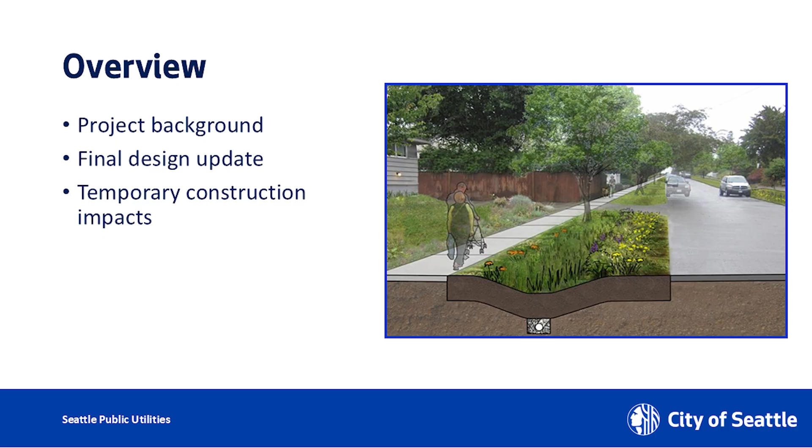I'm here to present to you the final design update for the Holden Natural Drainage System (NDS) project. Since this is the final design phase, I will be presenting a brief project background and focusing more on the design changes and temporary construction impact. All right, let's jump into project background.

So what is the problem that we're trying to solve here? Well, we live in this beautiful city that is surrounded by natural resources, and we have a lot of rain. The rainfall comes down and lands on neighborhoods, roofs, driveways, parking lots, and streets. And the runoff carries a lot of pollutants into our water bodies, in this case Longfellow Creek, the Duwamish River, and the Puget Sound.

Each year, more than 12 million pounds of pollutants are carried into our water bodies by stormwater runoff. This is not good for our environment or the citizens who live in this beautiful city. So we need to do something about that.

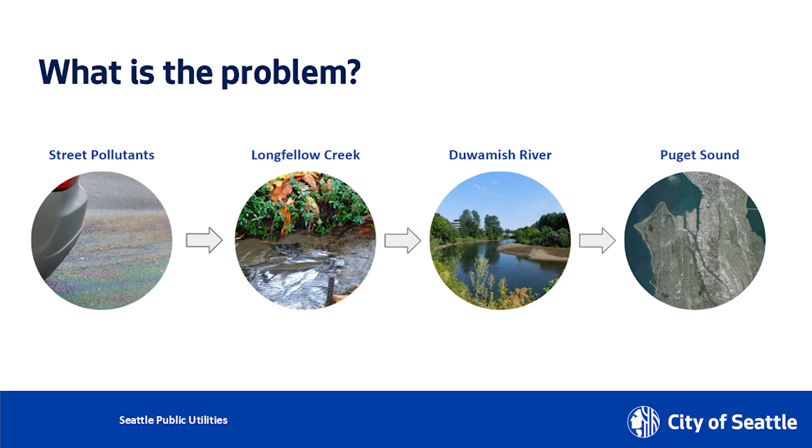So why natural drainage systems? As urbanization occurs over the years, our native forested land is converted to urban landscape. This urban development creates a set of issues, such as increased pollution, and reduces the land's ability to filter or clean stormwater through plants and natural soils. Therefore, the stormwater carries pollution into our neighborhoods, creek systems, and eventually to the Puget Sound.

Natural drainage systems essentially emulate nature. They collect rainwater and remove pollutants before they reach our creeks and waterways. We can't go back to the time when this land was a forest, but we could retrofit our city with natural drainage systems to help it function more like the native land it was.

So the benefits to the community include improved stormwater or drainage water quality, increased landscaping diversity, and new street trees. We'll be planting special plants and street trees. Because the natural drainage system is created between the sidewalk and the roadway, it creates a buffer from moving cars for pedestrians. Because of the greenery that we'll be installing, it will improve air quality and have some noise reduction benefit.

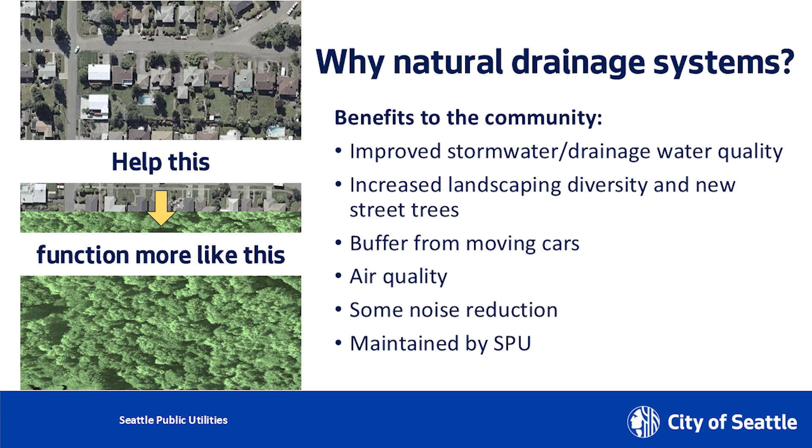Best of all, it will be maintained by SPU. We are not requiring the neighborhood landowners to maintain any of the natural drainage systems. In fact, we prefer SPU to maintain them.

Let's talk a little bit about how natural drainage systems work. In front of you is a 3D drainage diagram of an NDS system. I will go through the legend one by one and explain how an NDS system works. An NDS system is usually built between the sidewalk and the roadway. While you're walking on the sidewalk, which is legend number 1, you will see a strip of green patch that's full of landscape planting.

And if you look down a little bit more, you will see a gentle depression where at the bottom you will find all these special NDS plantings. The NDS plants have special properties that can filter out stormwater pollutants. Number 3 is the NDS plant. Number 4 is the weir. The weir functions to slow down the stormwater so that it helps the NDS plants filter out the stormwater.

And number 5 is a curb cut. It's basically an opening that allows the drainage water from the roadway to enter the NDS system. Once the drainage enters the NDS system, it will pond up by the weir, filter through the NDS planting, and eventually sift through the special soil we call filtering soil, legend number 7. Once it sifts through the soil, it reaches the drainage rock layer, number 9. Then it gets collected by the underdrain.

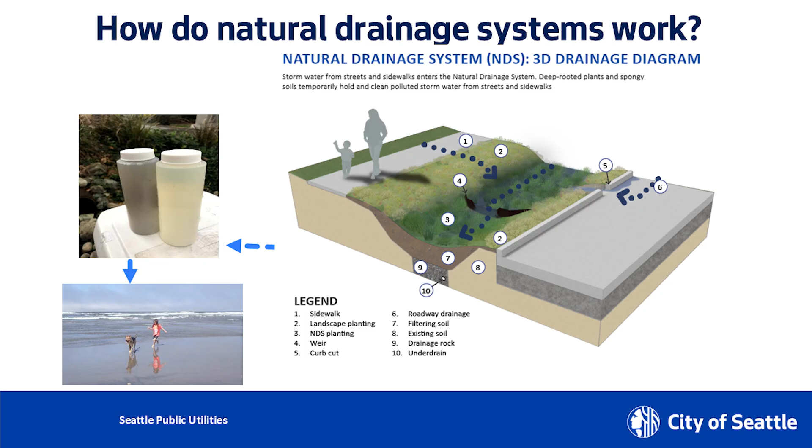You may be curious about what a natural drainage system would look like. Before installation, a typical street may look like a sidewalk next to a planting strip and a roadway. After our installation, you will see something similar to the lower left-hand side, with a gentle depression with newly planted, what I call baby NDS plants. It takes about a year for the plants to establish and more than 2 years for the plants to reach maturity.

Since this NDS system uses living plants and shrubs to filter water, the look of the plants does change by season. So the look in the summer will be very different from the look during winter time.

One of the questions that we are always asked is who will maintain these NDS systems. Seattle Public Utilities will be responsible for maintaining the systems. In fact, we prefer that people not maintain them because these are very special, sensitive plants. Please feel free to call our hotline if you see any maintenance issues in the future.

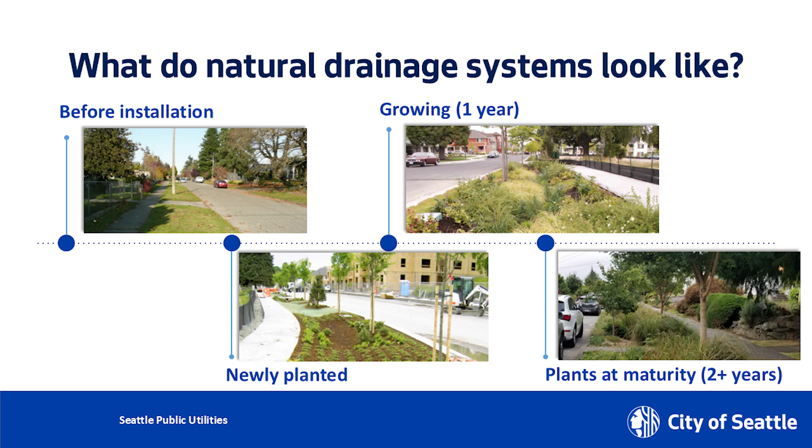Now we're going to jump into final design update. It's taking us a while to go from mid-design to final design, and there are 3 factors that influence our final design. One is the input from the mid-design drop-in session. We were made aware of a localized flooding issue at 17th and Holden, so we've been busy working on that.

And the fire department has a lot of concern on our project narrowing down the street further and also keeping the speed cushion. As you can tell from the lower right-hand side, the fire department actually showed up at our drop-in session. So after lots of conversation, we have decided that we would like to prioritize emergency route use. So the project will remove the speed cushion within our project limit.

The second factor is coordination for future development. There's the Office of Housing that owns a vacant land at the southwest corner of 16th and Holden. They are developing this into affordable housing. Their frontage and our project have a lot of overlap, so we've been coordinating on design and timing as well.

King County Metro also reached out to us during our permitting process. They also have plans to update the corridor, so we ended up having to redesign one of the curb bulbs so that in the future when they come in, there will be minimal rework.

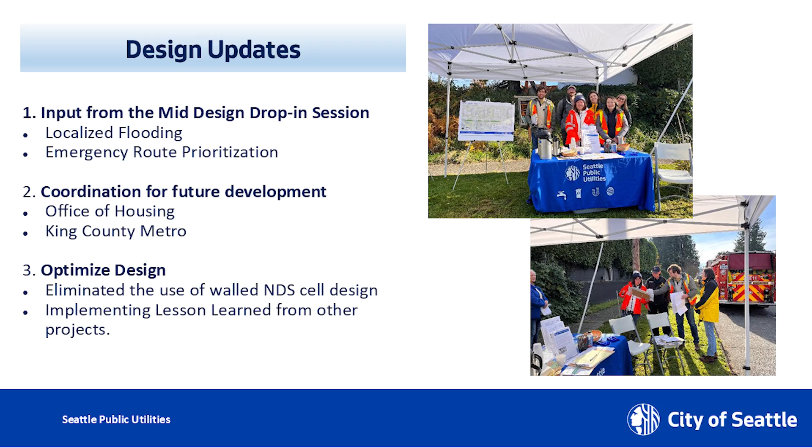In this case, we were able to completely eliminate that. So that was good news for us. And we also were able to implement a lot of lessons learned from our last couple of projects that are on the ground right now. So this project benefits from our lessons learned.

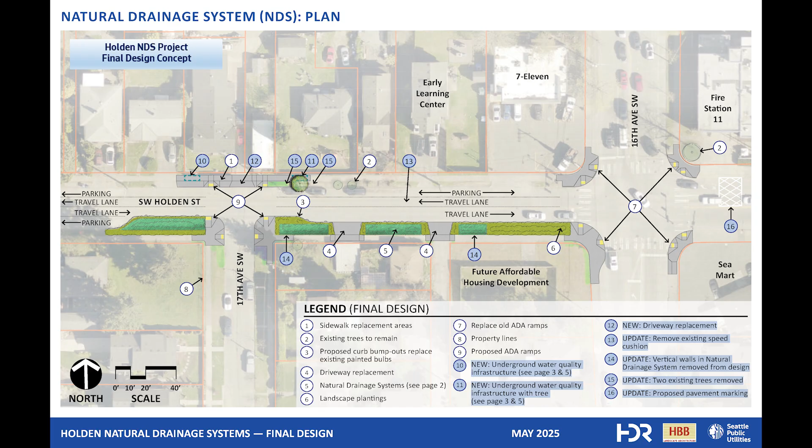Last but not least, you are looking at legend number 16, pointing at a very faint marking on our graphic. This is a new proposed pavement marking that was requested by the fire station. This will alert cars driving through this corridor that they should not be blocking the fire station's driveway access to the emergency route, which is Southwest Holden Street. So that concludes all the major updates for our Holden NDS project's final design concept.

Now we're looking at roadway sections. As you can tell, we have 2 representative sections here: section A, as shown in the lower left-hand corner where we cut the section, and also section B. Let's jump to section A right now. We are moving from the south end to the north. When you're on the south end of the street, you will be seeing a sidewalk. Then you move north, you will see a gentle depression. That is our NDS system.

Bubble number 2 indicates where all the NDS special plants will be, at the bottom of the cells. And there will be water ponding in the cells, as indicated by bubble number 6. This ponding would occur during storms, and the ponding depth is approximately 6-7 inches and never more than 12 inches. It will infiltrate within 24 hours of the storm ending.

So the water ponding in the NDS system will sift through our filtering soil, bubble number 3. It will keep going down and enter our drain rock layer, bubble number 5. And the cleaner water will be collected by our underdrain, bubble number 8, and piped into our existing pipe system.

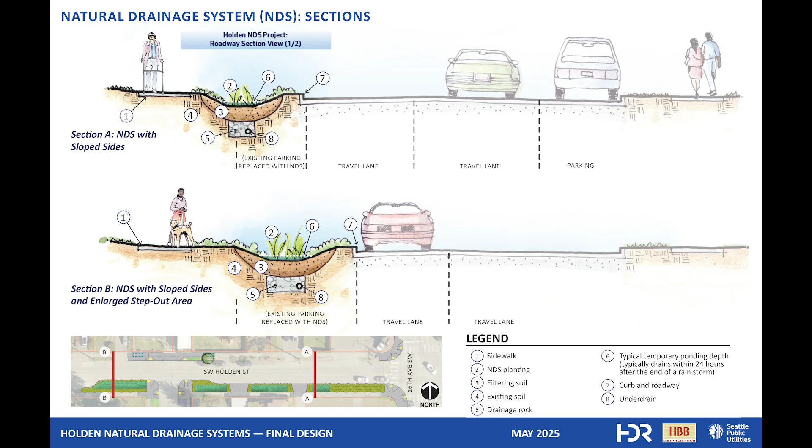And the water that's in the underdrain will be piped into our existing drainage system. As you move north, you will see again 2 travel lanes. Nothing is going to be changed north of this area.

This is another roadway section view that is more to emphasize our structural soil cell and water quality infrastructure on the north end. But I will still go from the south end to the north end to explain how the cross-section works. At section C, on the south end, you will see a sidewalk. And then as you approach to the north side, you will see the shallow depression where we will have the NDS planting or the NDS system.

As you go north, there is the eastbound travel lane, and then the westbound travel lane, and then there's the parking lane. At the north end of the parking lane, that's where we have the underground water quality infrastructures. You can tell that the idea is to maximize the volume of the filtering soil because that's where the stormwater would be entering the infrastructure, and the stormwater will be filtered through the filtering soil and get treatment that way.

So in order to maximize the volume, as you can tell on the right-hand side, underneath the sidewalk, we had some structural support for the sidewalk in order to create more room for the soil. The more soil we have, the more stormwater we can treat. So that's to maximize the stormwater treatment.

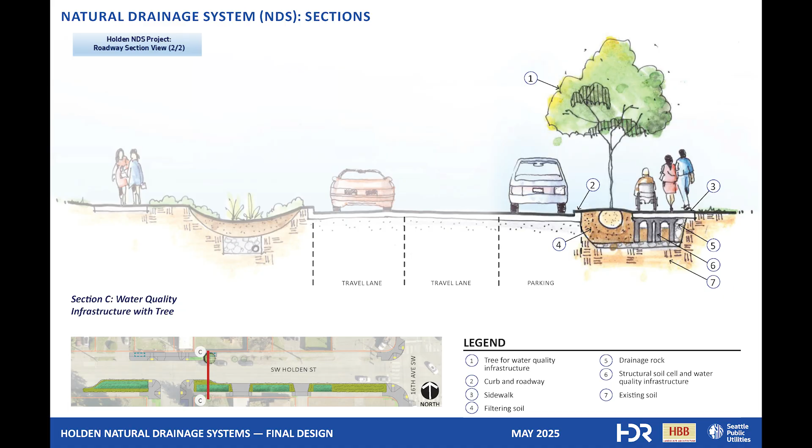So what can you expect during construction? Since we don't have our contractor on board, I don't have a lot of details to share with you at this time, but I can tell you that work will generally occur during weekdays between 7 a.m. to 5 p.m. with possible evening and weekend work. There will be typical construction noise, dirt, dust, and vibration.

Potentially, there will be parking restrictions and roadway closures. There will be pedestrian and traffic detours. Those will be in place and communicated ahead of time. Access to homes, businesses, and essential services will be maintained. If we have to impact any of the access, we will make sure that our contractor works with the impacted people to minimize any inconvenience. And we are also expecting temporary bus stop relocation at Southwest Holden Street and 16th Avenue Southwest.

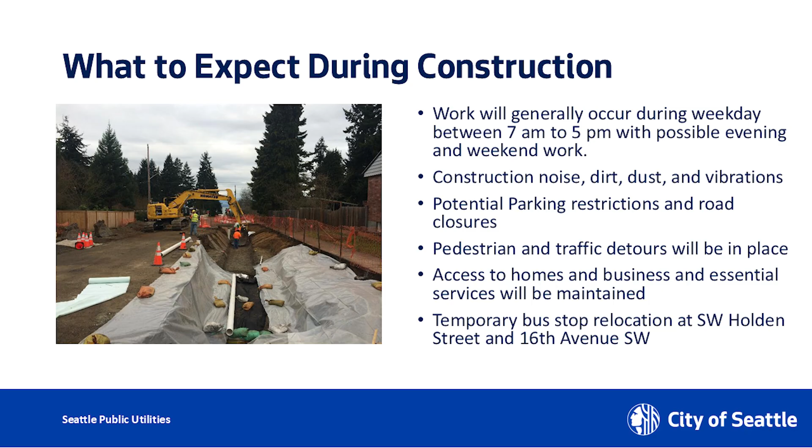We'll continue our communication strategy to keep you informed before and during construction. We'll be sending out flyers and mailers, updating the website and listservs, and construction notices will be sent out in advance. For any day-to-day coordination, there will be an on-site construction engineer that you can contact, or you can also work with the contractor for any issue that arises during construction. For any overall project question, you can send it to the project manager. In this case, that will be me, Wan-Yi Kuo.

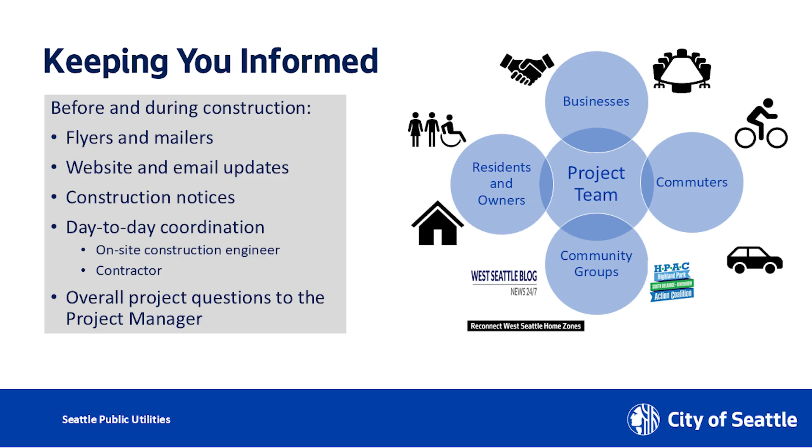We will continue to keep the community groups such as HPAC, West Seattle Blog, and SDOT's Home Zone program aware of our project's progress. We'll try our best to keep everybody informed.

We are planning for another neighborhood drop-in session on Saturday, May 31st. You can stop by anytime between 11 and 1 p.m., and we will be at Bedhead Coffee Shop. Address is 1513 Southwest Holden Street. As you can see, it's at the southeast corner of 16th and Holden. We hope to see you there.